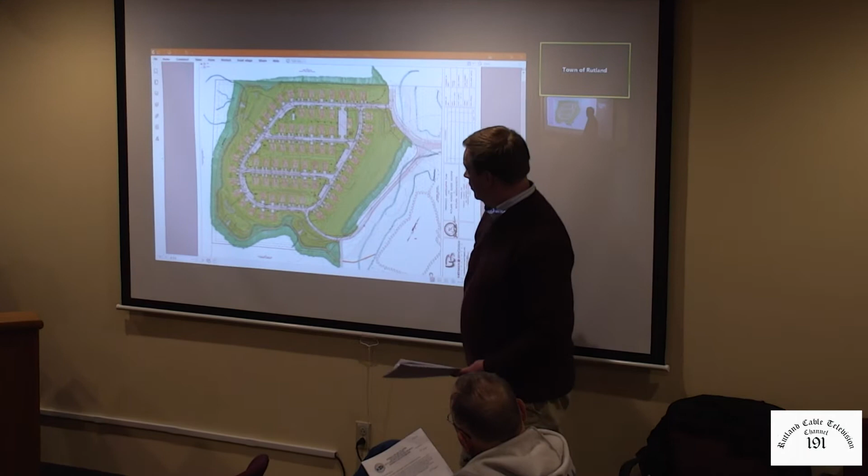Looking at approximately 4,240 linear feet of driveway. We don't consider this to be streets or roadways because we're not looking to have public layout associated with this. It's all going to be a private development. Everything's going to be maintained and kept within the association of the development, nothing to be taken over by the town. So we consider this as driveways. We did, however, design the driveways per the subdivision rules and regulations with regards to grades of the road throughout the entire site, and also the improvements here. We also, with regards to the width of the driveway, went along with the subdivision rules and regulations, being 24 feet for the amount of homes that we service by those driveways. So we did try to keep within the subdivision rules and regulations with regards to the roadway design, but none of it's going to be a public roadway network - it's all going to be a private network.

The proposal will tie into the municipal water and sewer in 2 locations. We have one location down here for the water and the sewer, and the second location will come down the existing driveway that will be improved to tie into the sewer and water that dead ends here at the end of the T on Rutland Heights Way.

The intent is to have this second access here that exists currently as an emergency access. About a year ago when the board met with the conceptual plan, there was some conversation about a second access. So what we were trying to do is continue the existing driveway that leads into the Rutland Heights hospital property, in roughly the same location. But from here to here, we had to show improvements to meet subdivision rules and regulations for grade and width.

We show minor improvements along the length of the driveway to meet a 20-foot width, to make sure we have proper fire protection. We had a department head review meeting, and the fire chief did get to see that and confirm he was okay with the width of the driveway. So that's what we're showing there, a 20-foot wide driveway.

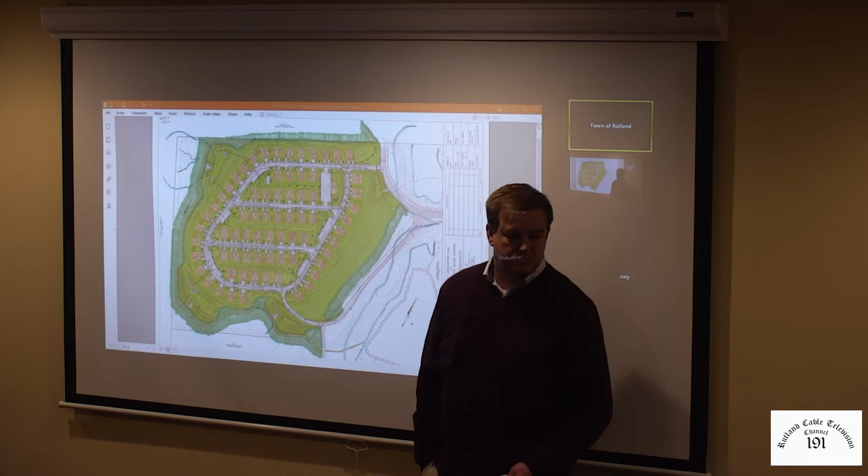One point we have to be cognizant of is part of the land disposition agreement we have with the town, which requires a certain number of units - I believe 88 - to be constructed within 3 years. So the phasing we're anticipating takes that into consideration.

We did incorporate this into our design - we have 2 connection points for the utilities for that reason, and also to help with phasing the project. We have the connections up here, so we can phase in a portion of the project for the sewer and water, and then work our way through, phasing the water and sewer as we go.

You'll start on the high side and work your way down, I presume? That would be the intent, to work on this side first. That should minimize erosion from getting too out of control - you've got a 300-foot run there, so it would cut pretty deep, but if you're doing small cuts, that's better.

This section here is really our biggest cut in the site, getting into the entrance, because the existing driveway is fairly steep and doesn't meet the subdivision rules and regulations regarding landing and so forth. So there is some cut as you come into the site, but we tried minimizing that as much as we could while still meeting the subdivision rules and regulations.

We do show landscaping on the plan, a mixture of trees and shrubs. Because of the type of development, and it was a concern of the developer, they don't want deep rooting trees, so they're working on figuring out exactly what kind of trees to plant. They're concerned about root impacts over time on the driveways, which are close together, and the sidewalks. So they're working on getting species that are aesthetically pleasing for the development, but also won't negatively impact the infrastructure long-term.

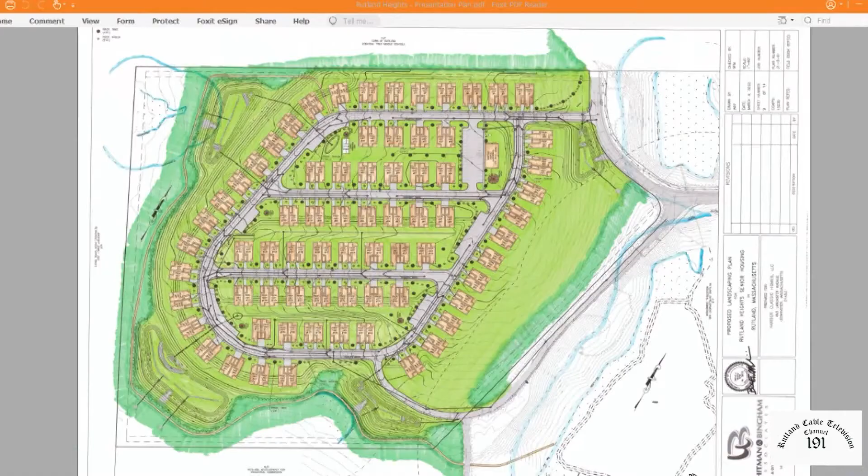I would ask, I don't know, what's the next step for the board? I can go over a number of items with regards to the standards this board needs to make their decision on, which I went over in my cover letter with the application. We can go over those now if you want, or wait to a different meeting as we get closer to the end of the review. That's a great place to start, so I don't think that's a problem.

So there are 5 things, and I'll list them out with our answers, and we can stop where you want to stop. The first one is that the project is consistent with the purpose set out in Section 23, the Heights Planned Development District. The project is proposed as a senior housing development with 142 single-story duplex units, consistent with that section, and I know that's one of the allowable uses within this district.

B is that vehicle egress on the site is designed so as to avoid hazard to vehicles and pedestrians. As I stated, the proposed driveways throughout the development were designed to the requirements of the Town of Rutland subdivision regulations: 24-foot wide pavement width, minimum grade of 1%, maximum grade of 8%, proper leveling areas at the end of the driveways, and minimum centerline radii of 125 feet or greater. We also propose a 5-foot wide sidewalk along one side of all the driveways to connect to the existing sidewalk out on Rutland Heights Way. We can talk about the sidewalks in a little bit when we get through peer review.

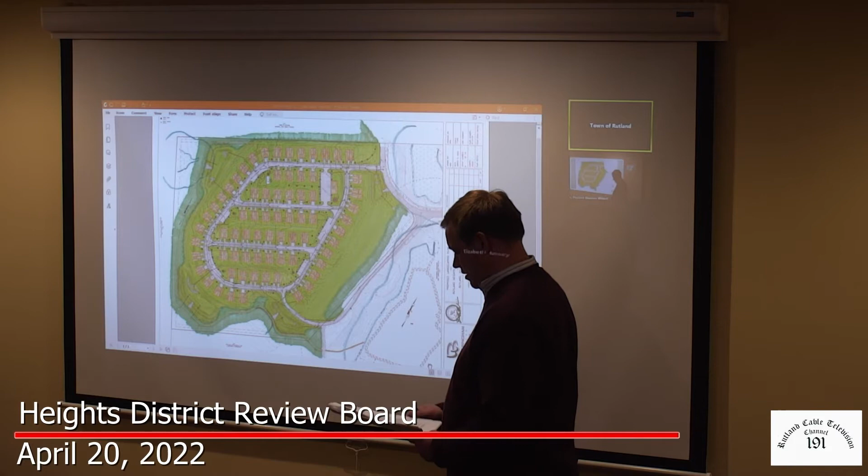Approximately 19 acres of the less than 33-acre project site was previously disturbed by the Rutland Heights State Hospital. The proposed development was sited to limit the amount of disturbance outside of the previously disturbed area. We propose about 7.5 new acres of disturbance, leaving 6.3 acres of the site in its natural setting, which would be outside the site to the west and south, and also this area to the east, within that Zone A of Rutland Heights Pond.

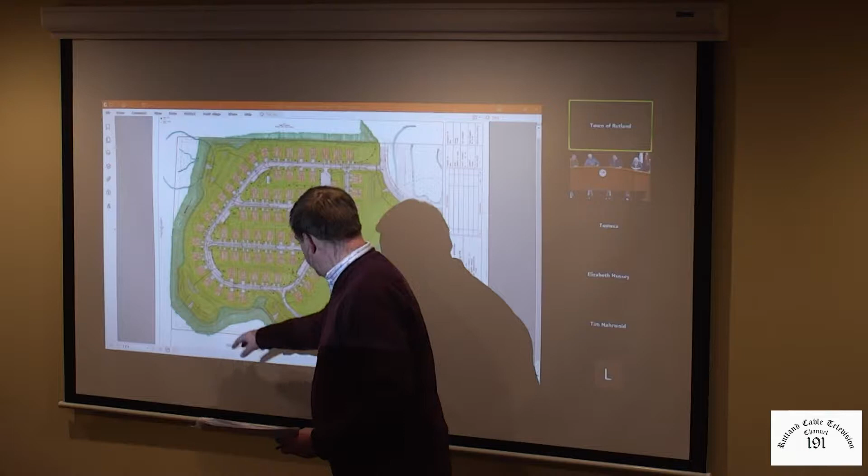Is that the darker green? Most of the darker green down here, but also this area here is fields. But we also, because it's in the 400-foot Zone A...

Rutland Heights Way - we're staying out of that? Yeah, because we will deal with DCR with regards to that, and we want to make sure we limit the amount of work within their jurisdiction. We're dealing with them for a determination of applicability right now, hoping they don't require any additional permits, that they're okay with it, because we kept everything really out of it. The only disturbance is really to the existing areas that are disturbed now, which is their driveway and a small walking trail, which I'll touch on in a second.

That's a public roadway, the bottom one, correct? Yeah, this is all town property, but it's not a public right of way - it's the town driveway out to there. There are other pieces of property in the back. I would hope they'd be a little more amenable, that's kind of why we laid it out the way we did - we tried keeping everything out of there as much as we could. Yeah, keep showing us.

The last criterion is that land uses are located to allow aesthetic circulation between one use and another. Undeveloped land is located in a manner that provides active and passive recreation, resource protection, and pedestrian and wildlife links to adjacent uses on and off site where feasible.

The project proposes, as I stated before, the community center, a larger gazebo, a pickleball court, and smaller gazebos located throughout. One thing I didn't point out before is the walking path that will connect into the gazebo and the pickleball court, winding around the exterior through the woods. Our intent is to drop them toward the pond so they can get a view of the pond and walk out to that area.

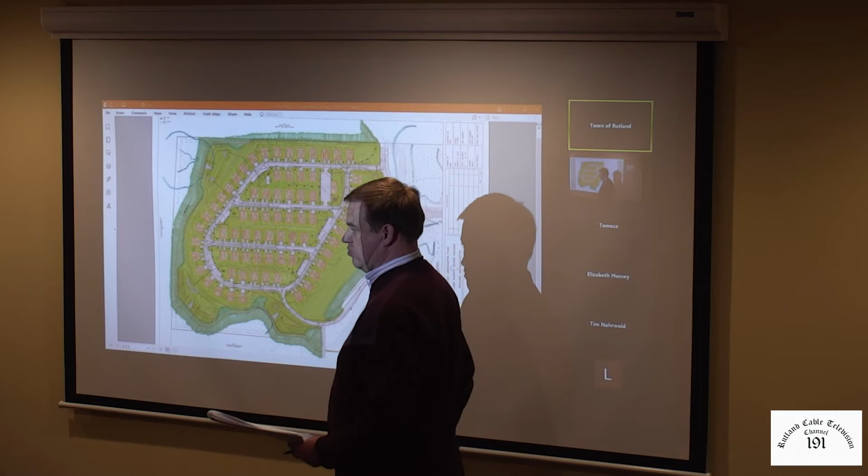The majority of the walking path stays on the applicant's property, but there is a small section that will be on town property, tying into the off-site amenity that the town has. Those are the five items that the board has to make the decision on.

Okay, all right, thank you very much. Anything else? There are a number of items that if you want to discuss now or hold off as we get going.

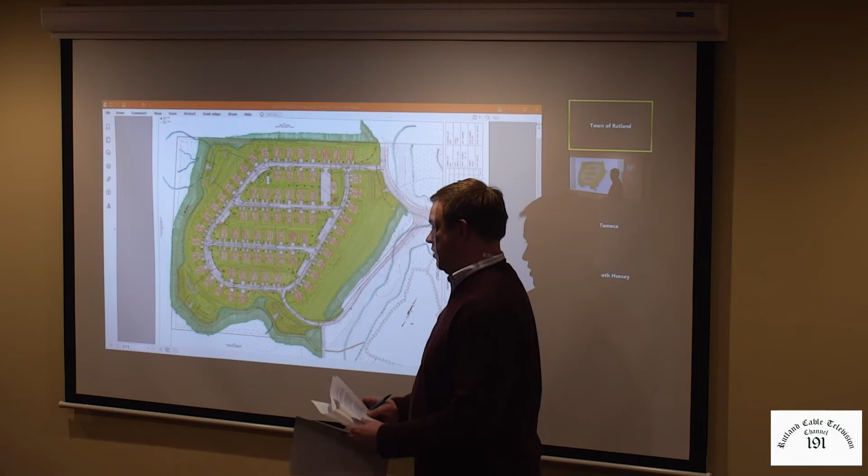I don't know when you want to get to the peer review or the Conservation Commission letter, we can. What I'd like to reference real quick is from the concept plan review we did, we had some items, and I'd just like to address those and put them out there on the table.

What did I do with those? It was actually in the meeting minutes, technically, that we had. Is this what you're looking for? Because that's got the 7. Yeah, the 7, yep, excellent, thank you. I think that's what you're looking for. Yeah, basically.

One is the number of units, well, the amenities that we talked about. When we went through the concept plan last year with the HCH, we came up with 7 main items that we'd like to see worked through, and just to put those out on the table here. The first one was amenities to be included and determined at a later date, which the applicants have talked about—the gazebos, walking trails, community center, flagpole area that they reworked, those types of things to build more of a community, not just a residential cookie cutter mindset.

Another one was the quantity of units, from 88 to 142. They produced a plan showing 142 units, so that's something we'll discuss.

The final purchase price was to be determined between HCH and the RDIC. The purchase price is not part of this board's review, just for the public's note. That's something the RDIC board and the applicant have worked through. Dick and Michelle are on the RDIC board, and they're also on this review board. But that's already been predetermined and worked out, and it's really not a condition of this board anymore. Just the fact that it got worked out, which it did.

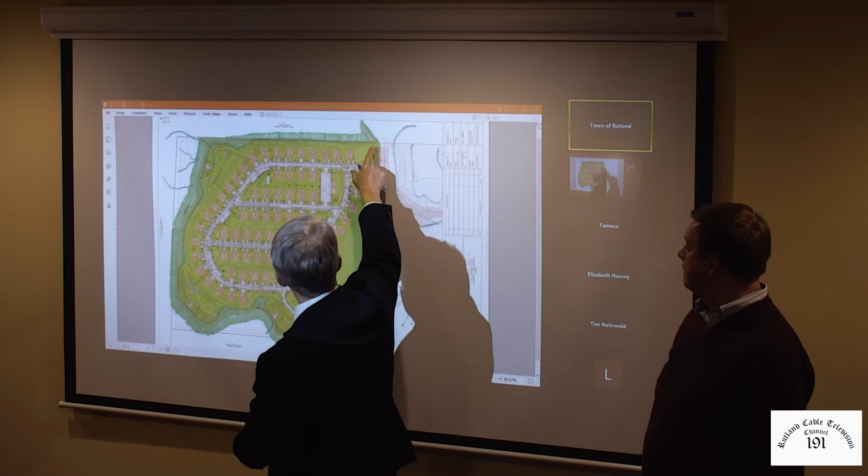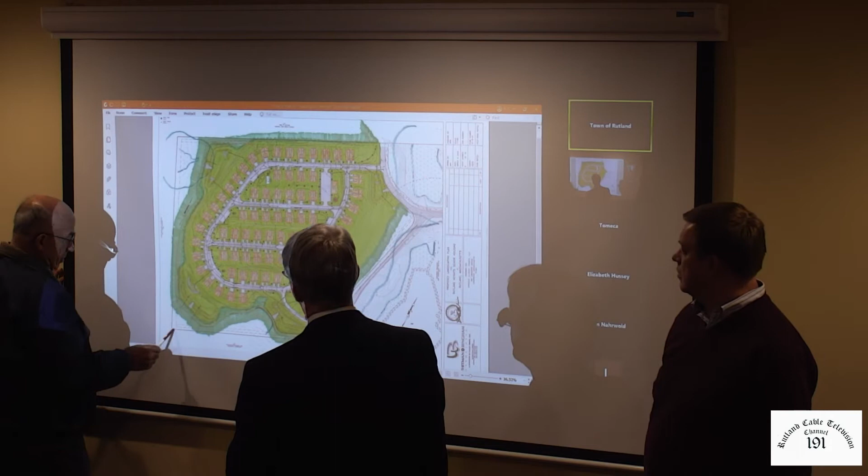We're assuming we're very close to that existing trail, trying to connect to it down at the bottom. Right now there's a path going almost to the very corner, near the chain link fence at the top—that fence goes all the way around, along the north and west, and then the south side of the lot. There's a pathway right now that goes down and around the edges. We went around the wetland at the bottom—you drew your line through the wetland, but we went up around it, since we didn't want to touch the isolated wetland. I'll say that trail went all the way around. We can definitely locate it and figure out how to tie into it.

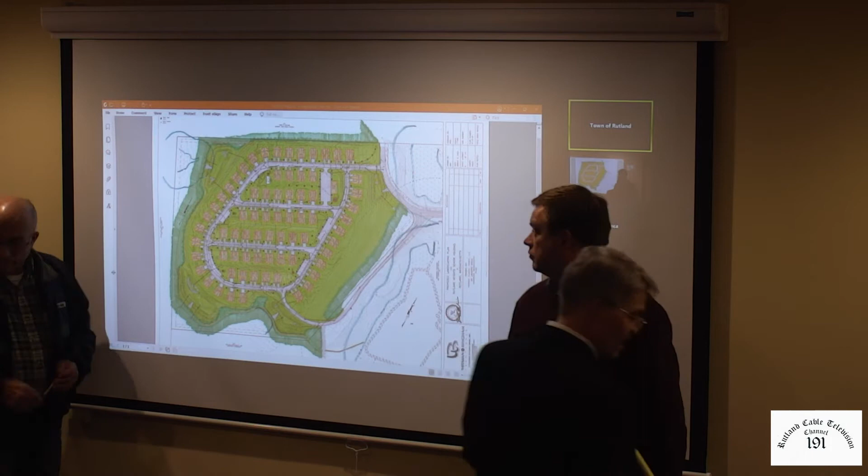It's not on our property once you get down there. So if it's off the property—that's one of the things I should have asked at the planning board—did your line go right to the chain link fence? No, it did not. The walking path we're showing now is different from the boundary lot line. That's one of the reasons why it does, on the western and northern property line, encompass all the town property and all the RDIC property. But is that chain link fence on your property line, or is it actually inside it on the town line? It's actually inside. So then they would own—that fence would be on their property, that is correct—by a foot or 2 or 6 inches or whatever it is.

One of the requirements is to have a buffer on the boundary lines. I believe it has to be landscaped and vegetated, and I don't believe you can have a walking trail in it, but if it's already there and existing, that's different. I'll definitely go to the site to understand exactly what you're describing, since it encompasses the boundary lines you're discussing and you're probably more familiar with the site than I am. I don't doubt the walking trail that's there now is probably outside what we're designing here.

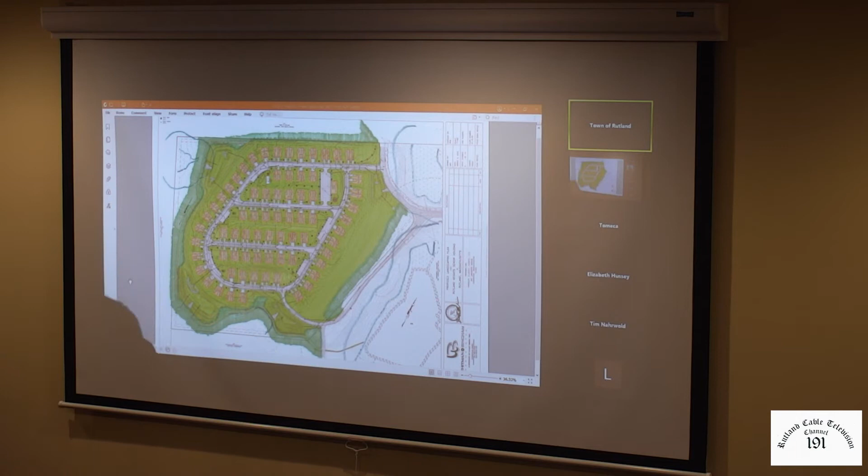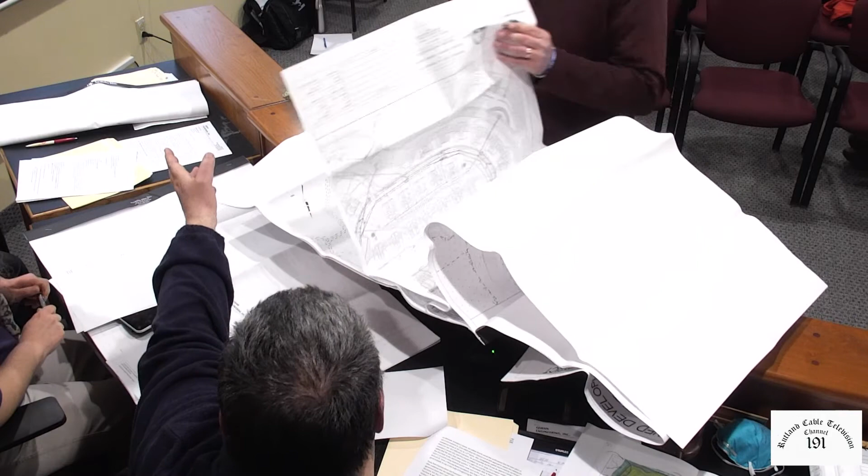It used to come around that way. See what's up in that corner? So we go down to the existing 30-foot buffer, and what about the trail on the right? Isn't that the property line offset? Go to the right, 'cause you get two on the south side. Correct, so the short one, the closest one, is the offset, and the other one's the 30-foot. And that other one looks the same distance as the western single one, right? So access to the walking trail - that's the 30-foot buffer, and that ends in the property line offset. That's perfect, isn't it what we wanted?

Not to belabor this, but I guess if it's possible, Attorney and Wes, could you guys look and see where that existing walking path is, and if it's something you can incorporate into a portion of this - understanding we've got to stay away from the wetlands and need room for the retention basins - but if that's something we can work within and try to pick up as best we can, is that amenable for you, Dick? We'll take a look at it.

I know off the top of my head, anything in this location here, that paved driveway you can come up on, that's all being taken out and loamed and seeded, and it's all getting regraded as part of getting the driveway in and the units in. So all of that's going to get removed. This will be the new start of the walkway across the street from that parking lot.

We'll take a look - really, I think the best we could do is maybe tie in down here to the other walkway. You keep on going and back around, and you can get up here.

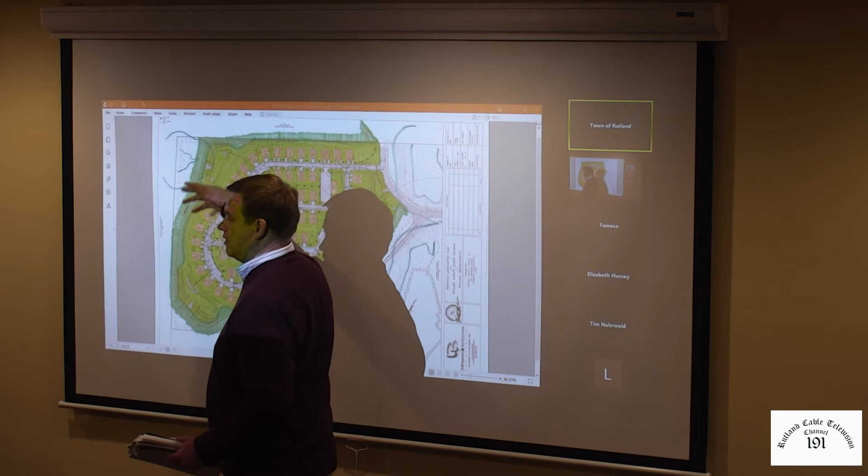As Ron stated, we were trying to stay away from the wetlands as much as we could, to keep the Conservation Commission happy and make sure we're not filling any wetlands. But also on that lower portion, there was an isolated wetland - if we start filling that, it becomes an issue. In the lower portions, I can see where you would make your way around here, and this is where we were trying to look at the areas.

Jim Crandon has a question - as part of this walking path discussion, I suppose any paths that you're taking over or connecting to on your property, I assume the homeowners association is also picking up responsibility to maintain them. Yes. Otherwise, if there are areas that don't make sense or don't meet your plans, that should be clearly stated. We'll definitely take that into consideration - an unmaintained trail doesn't do anybody any good.

Michelle, go ahead. But doesn't that make it more of a private trail and not available to the townspeople who currently use it? If it's being built and maintained on the HCH property, which is going to be a private community, it's not going to be public access - the roads are going to be private, like a private driveway rather than a roadway. So does that mean people can't use it, that it would be limited to just the community? That's something Peter and I were talking about too, and we have to have that conversation about how we can achieve that.

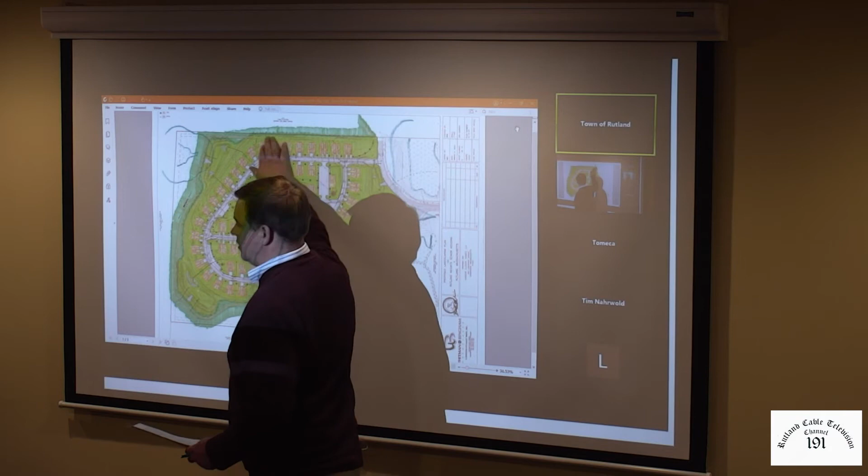We're proposing to grass it, but the slope we are showing here doesn't really lend itself to great landscaping. There's a fair amount of trees between this and the middle school, so we weren't showing any landscaping. Does it drop off back towards the woodline? Yes, especially with the road grading, there's going to be about 6 or 7 feet that drops off to the back there, so there's not a lot of usable space to put substantial landscaping in the back.

So we're gonna have it grassed, and the existing tree line will stay along that property line on the other side of that fence. That's really where our landscaping is gonna be, our buffer to the middle school, and the project is gonna be what's there now.

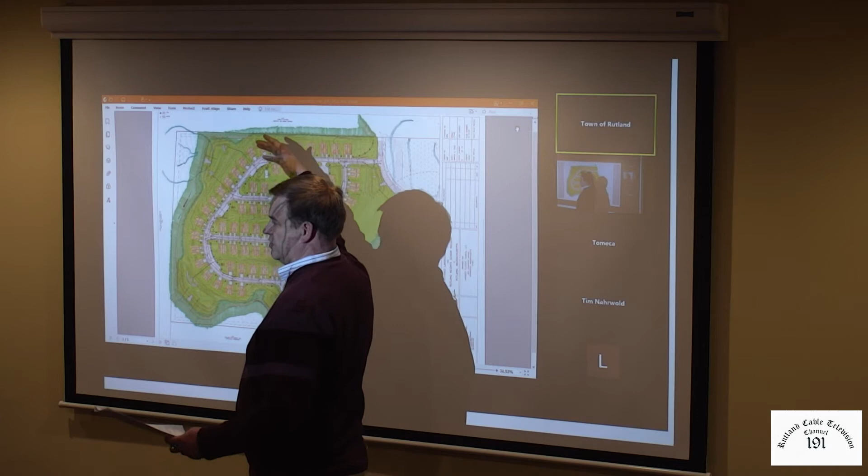Okay, so what Wes is referring to here in these HPD bylaws, we're gonna have that 30-foot landscape buffer. They're just gonna grass it, kind of using the wood line that's on the town property, correct? It is.

So what's your thoughts on that? I'm happy, you're good with that? Yeah, just let them grass it and use the existing wood line. Is everybody okay with that? Yeah, there's a whole lot of trees there, and I don't know what they use that land for. It's probably a couple hundred feet. I don't know how you build right up to the lot line there. Several hundred feet of trees at least.

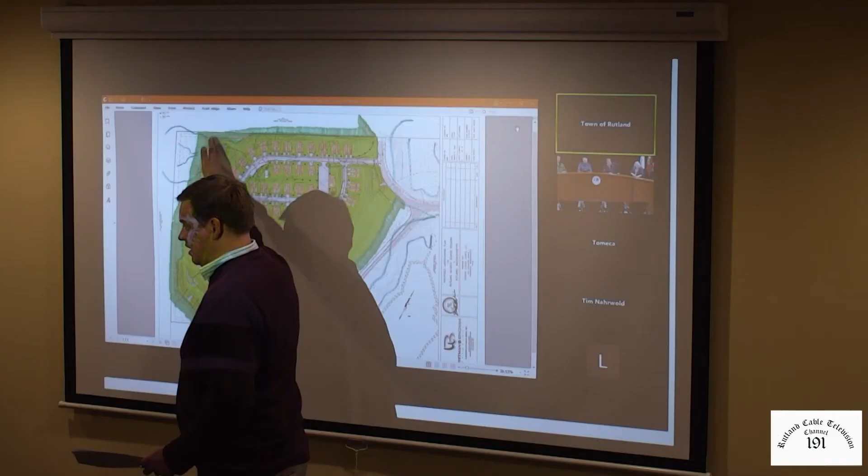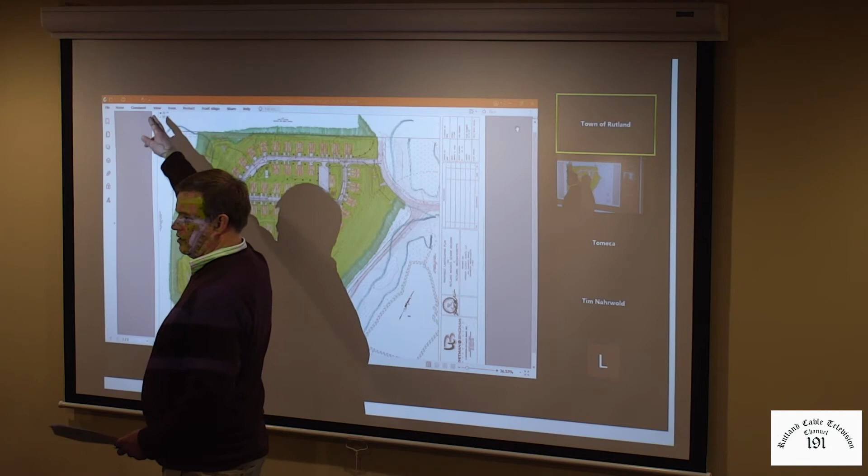And then on the other property lines, we're leaving natural vegetation on the other boundaries. Does anybody know if any of that's wet in there? I see the wet coming off that north side, northwest corner, up on that north side there. There may be a small wet area over onto the west, just off to the side, because everything kind of comes back around and wraps through this property, down to the pond to the south. So it's pretty unusable land, as long as it's a swamp. If it's a swamp, yes, definitely. Yeah, if the town ever wanted to expand the middle school property, they could.

Yes, okay, all right, I think that's fine. We could work with that. Number 10, a landscape strip is required along the front lot line, and then they defer to the board on what landscaping.

Like I stated before, the basin location really is dictated by the grade. It has to be in this location. There's nowhere else we could put the basin. It gets fairly steep in here, so we really can't, and we didn't want to get into playing with the existing depression that's in the corner there.

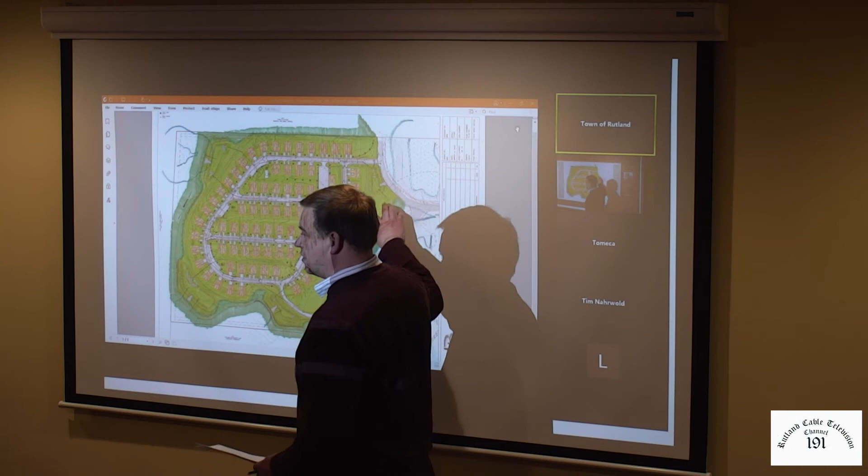Sidewalk's on the other side, right? The sidewalk is on the other side, yes. And then we do show our landscaping and our entrance sign as you come into the project on your right-hand side. You get a sidewalk, kind of curls up north, you've got a crosswalk going across that road, and then a new handicap ramp to tie into the existing sidewalk on that side. Right, and so everything will be tied into that.

I mean, the sidewalk's not on that side. If he's gonna run the retention basin up to it, does anybody have a problem with that? No, no. So the sidewalk just goes up to our property and stops? Nope, it ties into the sidewalks all the way through.

There is no sidewalk on that Rutland Heights Way property - there's no sidewalk there. It's on the sidewalk all the way up this way, and we're gonna tie right into it. There's a sidewalk over there. In that little piece of land between the parking lot and our property? No, he's talking about the main road, Rutland Heights Way. Right up to when you hit that point where your fingertips were, that's where the sidewalk stops.

Correct, up here, and the sidewalk is on the right side, on the lot line. He's gonna tie in, and then you can at least walk down Rutland Heights Way back out to Maple Ave and to the center of town. So there will be a pedestrian connection there.

So as the sidewalk comes down, the retention basin's on the other side. It's gotta come up to the edge of that roadway, but like I said, site constraints on the road, we really had to do something there. It was something that we looked at, and the only other area we were looking at is the small patch across the street, but there's such a steep slope, it didn't make a lot of sense. So that's kind of where we put it. And we were also out of the 100 foot zone, and it is steep over there, so it does make sense.

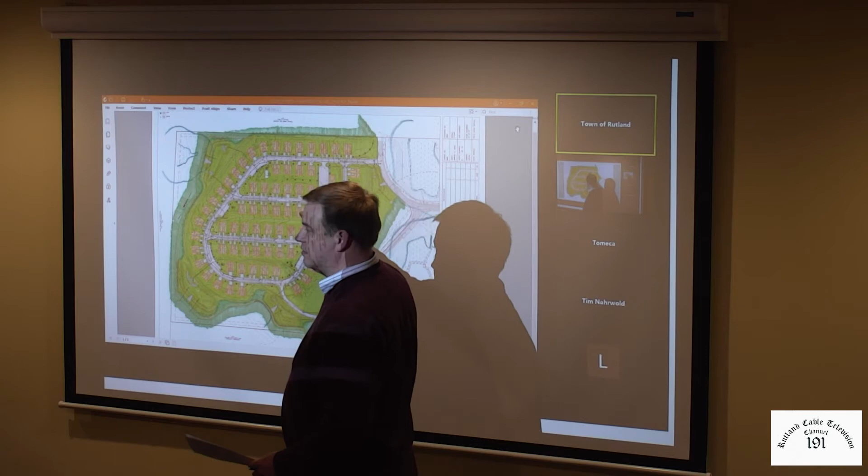Again, it was something where he wasn't sure if the board wanted any kind of islands. For the size of parking areas we show, we didn't think it was really necessary. It kind of defeats the purpose of what we're trying to do, because then we'd have to create an additional parking space outside of that island. We thought it'd be better maintenance-wise to keep everything in one compressed area, especially when they come to plow.

Exactly, bingo, right there. I know our guys hate islands, right? Oh, God, islands are... yeah, especially for parking lots of this size, they're so small, we didn't think it would be necessary.

Just to play devil's advocate, you've got a big asphalt area, big impervious area. It's not Walmart, but it's still a parking lot. Personally I don't have a problem with it, but I want to make sure everyone on the board understands that putting a set of islands in the middle breaks it up. Personally, I just think they're going to tear them up every winter plowing that lot, and it'll look worse than if you think a parking lot looks bad already - it'll look worse when they're beat to hell. I don't see any problem not having those on that particular parking lot.

So I'm going to skip ahead to number 15 now. The other items are things we already added to the plan or already talked about.

Number 15 is under your senior housing bylaw, and this is where we've had a lot of conversation over the last year during our project meetings with the town, trying to get to this point about which regulations hold and which ones don't. The HPDD regulations within the zoning district call for certain buffers to property lines, but the senior housing bylaw has other buffers. He had questions regarding the required setbacks - it wasn't clear to them, and he wasn't sure if the board should be the one to have that conversation or if it should be the building inspector.

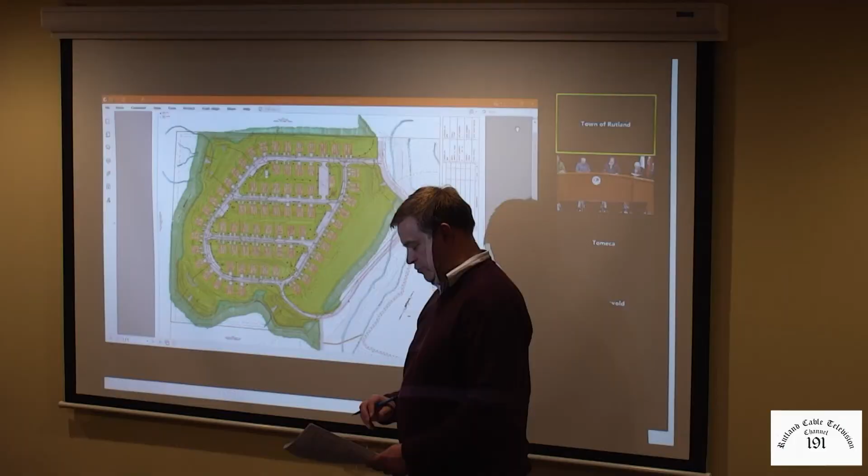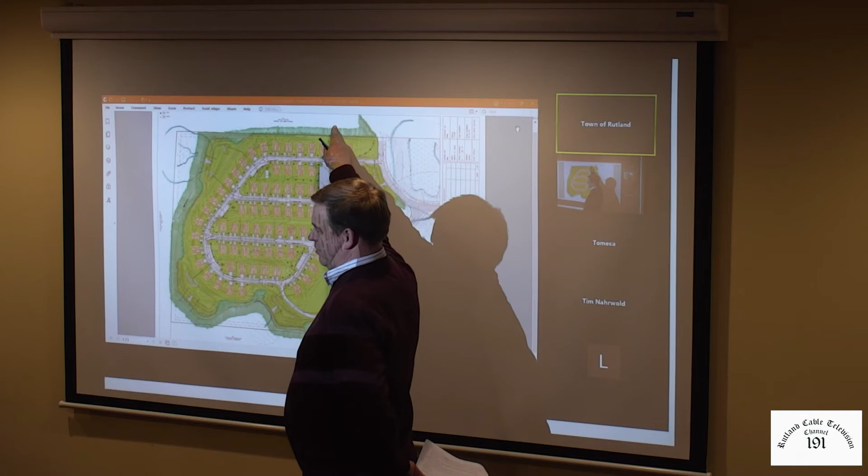The only item, at least with regards to the senior housing regulation, that we saw was different from the senior housing in the HPD regulation would be the buffer to the northern property. It talks about single-family residential zoning. Technically this is residential zoning, but we know it's not single-family - it's an institution, right? So that was the only section we saw in regards to whether it needs to meet that requirement.

We show 40 feet between the back of the unit and the offset, which meets this board's zoning district regulation. But the senior housing regulation calls for a different buffer if you're next to a single family - their buffer is 50 feet. That's where that trade-off comes in. We've talked a ton with David beforehand about waivers, and Quinn was talking about it too - we're trying to figure out if that's another waiver we have to add to the list for this board to take a look at as part of this process.

It might be a formal way of making sure we close the loop on it. Wes, if we would allow the 40-foot versus a 50-foot. We've had some conversations, Dave, before where the way I understand it, David, and I'd like to reaffirm your opinion, but this board has the latitude to go where the HPD has the lesser standard.

We have the full ability to go to that 40-foot rather than be stuck to the 50-foot of a true 55 community, correct? I think it's even simpler than that. In this 24/5, it specifically says a minimum 30-foot buffer shall be provided at the rear and side district lines of HPD. The board may require larger, but the board doesn't have to require larger. And then it gets into other requirements, and C says all structures and uses shall comply with the town of Rutland zoning bylaw.

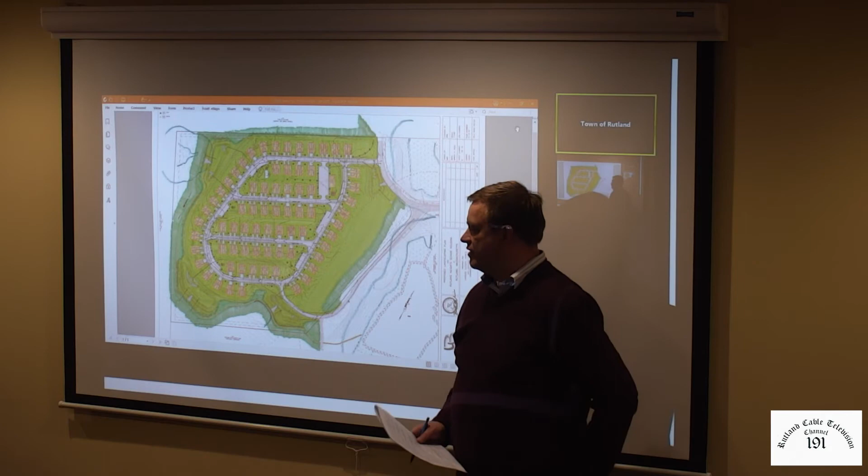Exactly, I think that's exactly it. Quinn, if this was the ordinary subdivision, we're looking at the zoning bylaw, the open space in particular, and the subdivision regs. In this case here, we're looking at several different bylaws and several different regulations that all have to harmonize. I was around on the RDIC when that was created, and the intent was to give this review board latitude to meet the intent of the Rutland Heights bylaws, and this is not just an average, run-of-the-mill planning board subdivision.

Whatever would happen up here is going to need certain tweaks and things to fit this property, to work with an applicant, to get somebody up here to develop this property. So the town certainly built that latitude in there to help develop this property and come to a project like this.

So I think we're all in agreement here that that's pretty much the way this is gonna roll. Perfect, and that's right along why we just want to make sure that that was the intent, because we wanted to make sure if we had to ask for another waiver, we would add it to the list. Yes, and I don't have a problem with this, especially where it's abutting the town property up there.

But we don't set a precedent against ourselves though, do we, on the other lots? Because I could see where someone might not want something 30 feet, closer to a property line where there's an abutter existing there. Yeah, I mean, again, we have the 30-foot rule that we can go up to, so we're not gonna get closer than that, right? We're not gonna get closer than that. They would need a waiver on that.

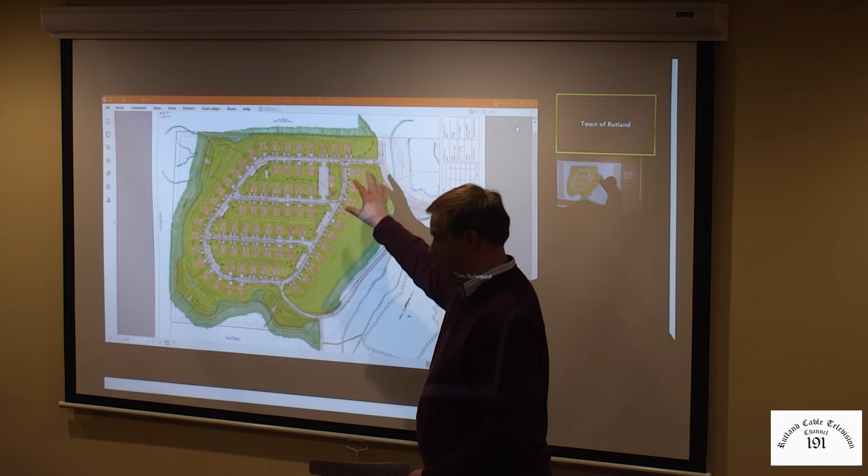And the other requirements in the senior housing bylaw and the HPDD bylaw, we do meet all those other offset requirements. That was the one that stuck in my mind, because there was confusion, and we went by this zoning district's bylaw. Other than that, we meet both requirements, so it doesn't matter which one you were to use, we meet both of those.

Thank you, Wes. I'm going to skip ahead to 19, because we did talk about it real quick. The fire chief, Quinn, recommended that we solicit comments from the fire chief, which I know he was submitted the plans. It talks about adequacy of access, and I'll touch on it again, as we do show 2 points of access, 24-foot wide and 20-foot wide.

I know dealing with the fire departments in the state, they require 20-foot wide width minimum. Some guys will allow gravel, some will want all pavement; we show all pavement for 20 feet. That's the way it's going to be - it's going to be a paved road all the way through.

We've had some considerable discussion on this, and I believe, as a board, we're pretty adamant the best thing for this town going forward is to get that paved and cleaned up. Let's get this place looking nice on that hill, get the right road in there. We got someone that's willing to help us out with that - having the town work with DCR so that you guys can accomplish this, I think is the best thing for both of us. At the end of the day, the town's going to benefit, as well as all the people, and it's going to be a nice, beautiful end to the project for you guys to help sell up there too. So I think that's the way we want to approach this, Wes, okay?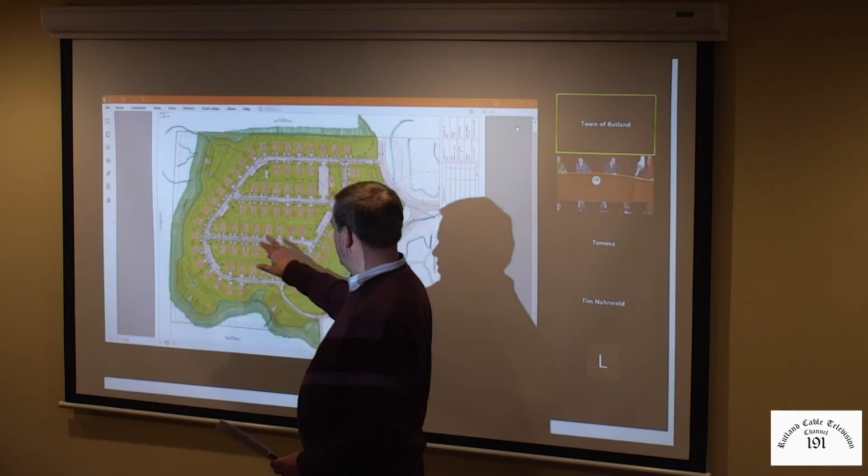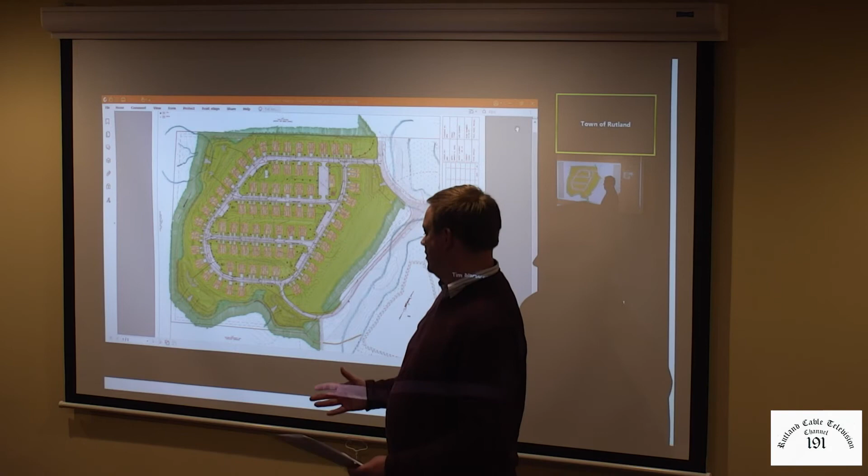I can tell you, at least on a fair amount of these here, there's not enough room to park a car in between the two of them, because it's literally only about 10 feet between driveway to driveway. So there's a 10-foot grass strip there - a lot of those areas, you're not gonna be able to park even in there. So I can see it both ways.

Not looking for granite curbing, no. Not even precast concrete, but asphalt - yeah, that's the extruded type, right?

Just to let you know why we like it - was that 6-8 inches or something like that? Yeah, about 6 inches. It's got straight, clean edges here. Snowplows, when they hit it, they don't wreck it, they slide up and over it. That's the idea of the Cape Cod berm too. So it's 6 of one, it's a trade-off.

Yeah, I mean again, I like it - I like to have the edge, the edge, yeah.

Are you okay with the sidewalk up to that edge? Yes, I mean for this, because of the way the whole setup is - for a subdivision it'd be a whole different story. And I agree with you too, it's the clientele - remember it's an over-55 community.

Granted, you're still gonna have people that goes both ways. 55 - be careful, 56, I know. That's a double-edged sword, I agree with you. They're not always more experienced, but they know what they're doing - well, they aren't always right on target either. But you see less traffic.

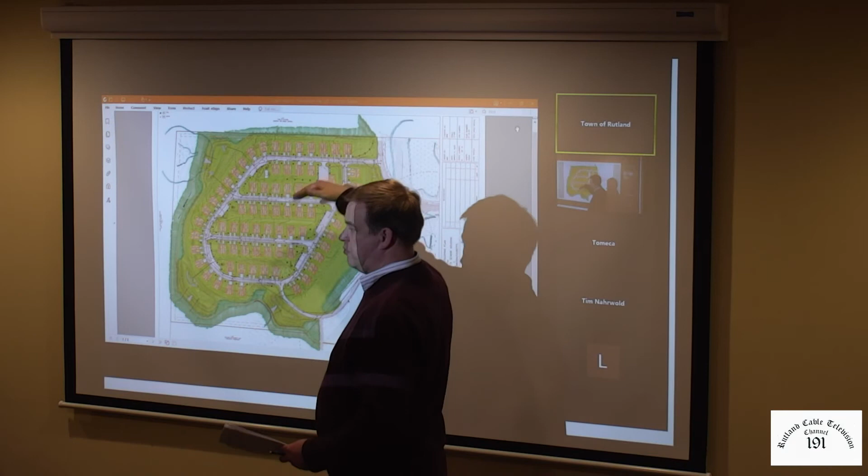I do want to let you know, if you want to have that 5-foot grass strip, all the units on that side will have to be pushed back another 5 feet. We'll have an additional 5 feet to the driveways, and it will compress the backyards a little bit, and even the same with the exterior. So it is gonna be a change.

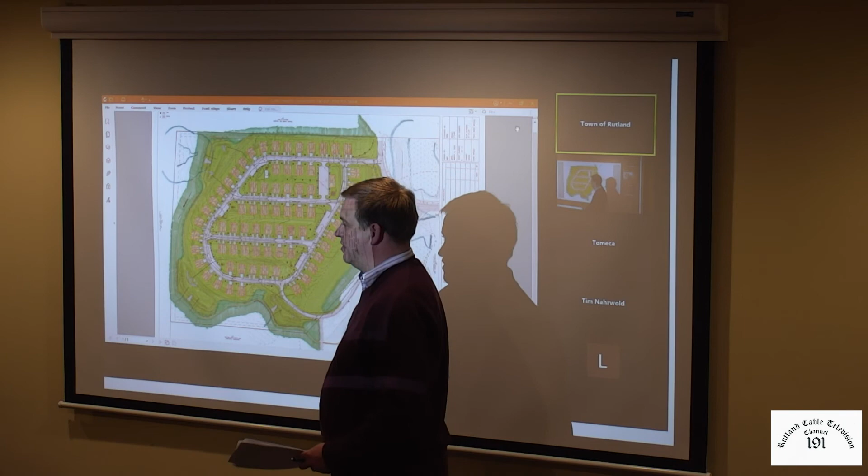To have the strip, you're saying? Correct. But you wouldn't have to do that if we kept it up tight to the road. Correct, it doesn't, exactly. The layout stays the way it is, because it'd look ridiculous having a 5-foot grass strip.

And that's what I'm saying, the units that have the bump-out in the front, it's gonna be 5-foot paved and then 5-foot grass. It's gonna look a little different there. So that's why we're thinking a 10-foot grass is more substantial. It has a better look to it, where you might be able to shrub it.

How wide did you say the sidewalks were, Wes? 5 foot, I think. It's pretty good size.

What do you guys think of that? If we mandate the speed humps in there to dictate that, keep people going, what's your thoughts on that? I think the speed humps are a great idea, Jim, because that's gonna keep the speed under control. Sometimes it's fine for Florida, but is it okay for up here when you have snow? Well, that's why I mean, they're all around in parking lots, you see them in every office building.

Schools, we can do it up here too, but a lot of times now they've been using the smoother speed humps, it's a 3-foot, 4-foot wide, so you can plow it a little more effectively. It's not the old one that'll shake your teeth out. But it's a pretty good size stretch, and it's low profile, but it gets the job done and it doesn't ruin your car. It keeps you honest. I mean, let's face it, if you're out of control, nothing's gonna stop you.

Chris, I don't mean to interrupt. Yep. Tim has his hand up. I didn't know if he wanted to comment on this. Tim, hang with me just one second, I just wanna get the board's opinion on this, how you guys are feeling about that. I'm all set, but maybe you want to listen to what Tim has to say first. Yeah, if nobody else has anything, we'll throw Tim on there.

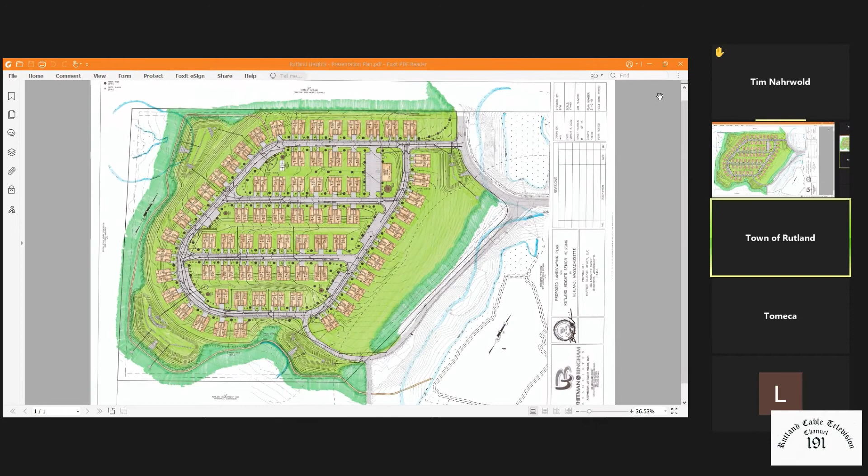Thank you, Tim. Any other comment on this? All right, so are we safe to say that we're okay with this up to the edge? Jim, are you all right with that? I'll move it. Okay, all right, so we're good with that then, with the edge curb. Go ahead.

27, and it's a little bit of conversation with Quinn, but I also want to ask the board. So 3 of the basins are designed, we call infiltration basins, which would be the 3 here. Yep.

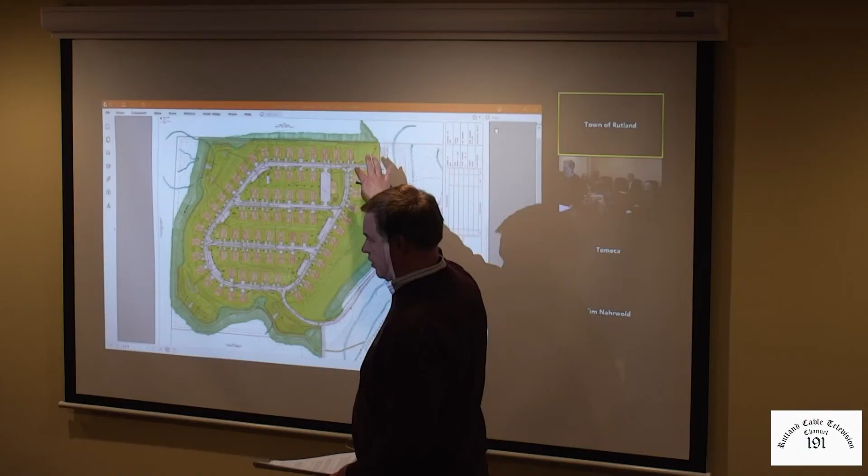We're required to infiltrate some of the stormwater back into the ground once we start adding impervious surface. This basin, we couldn't get to work as an infiltration basin because of the way the grades work with the driveway, we had to get it deeper. That's not going to act as an infiltration basin.

So we're required to have offset to groundwater for these basins, but these basins are shown, majority of them, in fill. So we're not necessarily so concerned about the offset to the groundwater. The other reason I'm not as concerned is that there's a fair amount of elevation change before I get down to the basin here. So if I need to raise the basin 2 feet or another 4 feet, stay out of the groundwater, these 2 basins, you're all right.

We could do it during construction. To get out here to do the testing right now is a little more difficult, and we're required to do soil testing to verify groundwater depth. What we put in our analysis was that during construction, when they start to clear out here and we can actually get to those areas of the site, we would do the test pits. We'd be willing to alert Quinn Engineering when that's going to happen, so if they want to come out and witness the testing with us to make sure the groundwater depth is where we're saying it is.

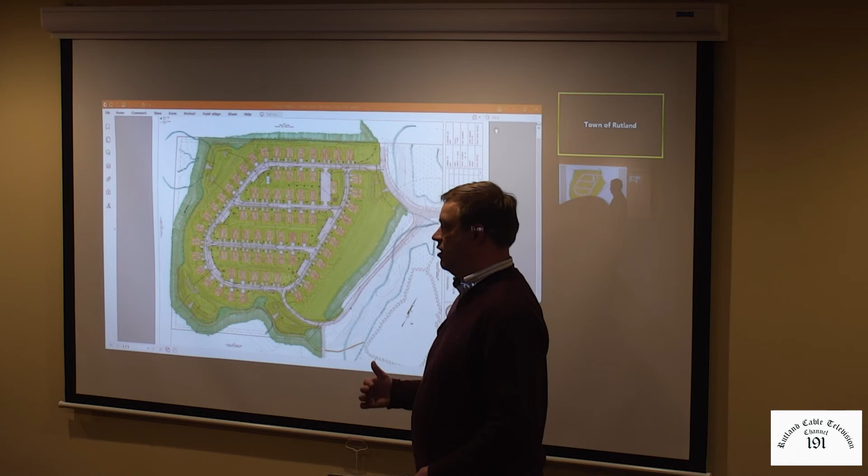But we do have some flexibility within the design to raise those basins if we needed to, another 2 feet, if the groundwater was, say, a foot under the ground, which we don't foresee. Very unlikely. So we do have some wiggle room there. We'd rather do the testing.

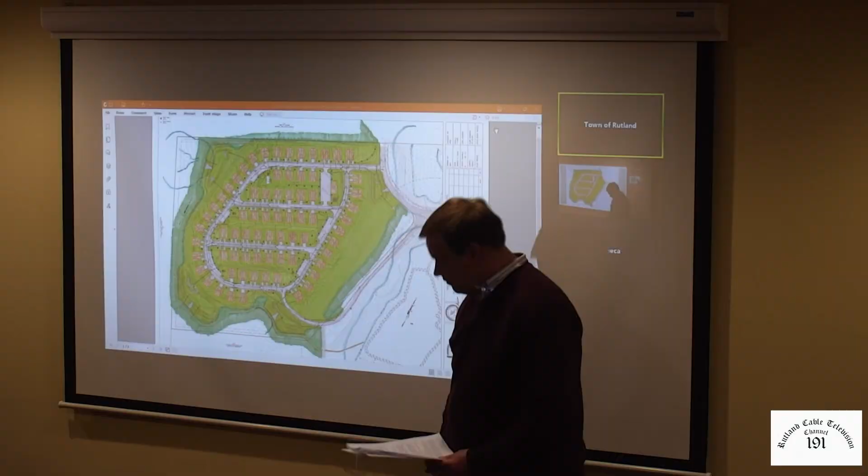Okay, yeah, perfect. Yeah, oh, yeah, sorry. No, so- Oh, yeah, excuse me.

Hi, my name's Jeffrey Ham. My wife and I are abutters, and groundwater is a real concern for us. We own property at 100 Maple Ave. Currently the groundwater runs about 8 inches below the basement slab, and it's dealt with by sump pumps.

We'd like to try and be assured in some way that this project isn't going to affect what we have. Currently it's a preschool, and should that groundwater level change, we're going to be faced with space that we can't use. The building that was built next door to us years ago did cause a groundwater problem.

The state came in and did some remediation, but it's kind of a messy situation we have right now. I don't know if you have high groundwater, Doug, or not. I can get 4 feet of water in my basement, yeah, so it's a really high water level. Right now it's managed.

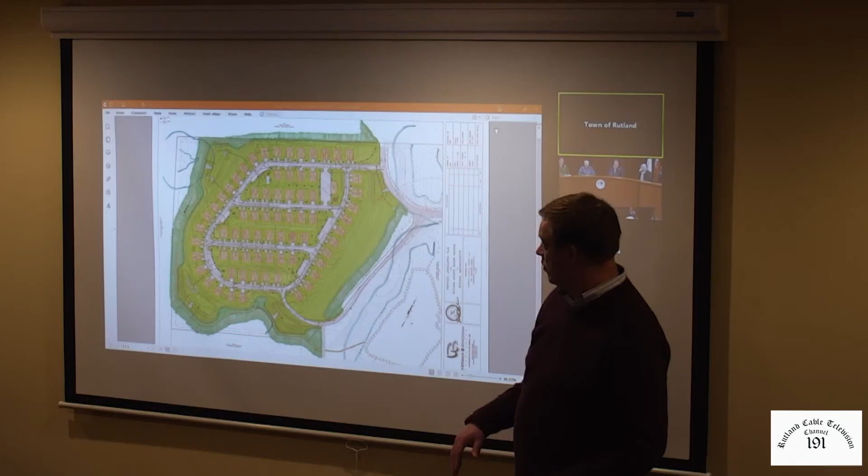This one's going to be on the other side of the little stream that goes down through, so you're safe from this project here. At least surface water wise, any of the water from this site gets to the pond and goes down toward the southwest. It's not directed toward Maple Ave. Everything's cut off from here and goes off to the southwest.

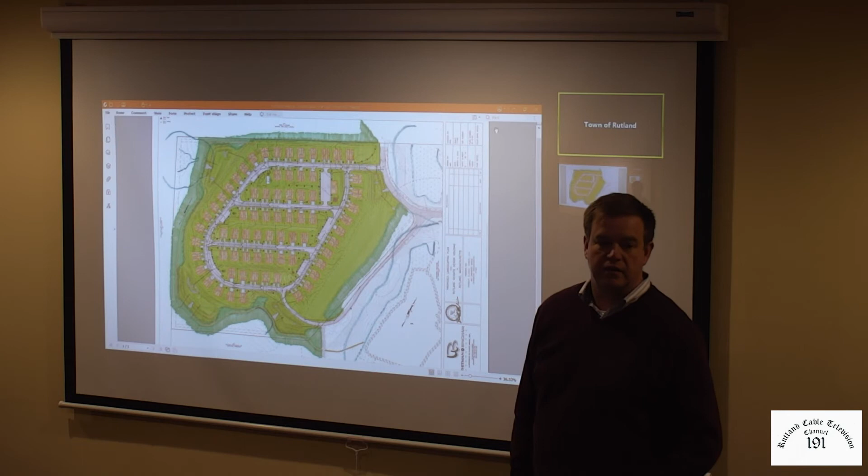So the level in the pond is managed, is that what I'm hearing? The way we have to do our drainage analysis, we've got to make sure we're not negatively impacting that water that goes to the pond now. That's why we did all the stormwater analysis, to show that we're not increasing the peak rate of runoff to the pond. That's part of what Quinn Engineering looked at—if there's naturally there now, they've studied that, and we can't increase that amount.

Correct. Does that make sense? Okay, that's going to the pond. And we've got to be careful of that pond because of that dam, it's in very bad shape. The beaver is our biggest problem with that pond, because they come in to stop it, and then the water level comes right up to the top. The managing of that, which they've been doing really well lately, keeps that water level down where it should be.

So just to give the overall picture, this gentleman, Wes, is the engineer designing this to maintain the water. But we also have Quinn Engineering reviewing all the calculations. They're a third party from Paxton with no stake in the game, just looking at this to protect the town's interests, particularly the abutters, making sure his calculations follow state requirements so all that water goes the way it naturally goes.

This is just a brief outline right now of certain things they've found, raising questions to get more information on. So we're going to continue with this, and Quinn will be making sure. I'll never stand here and guarantee you won't get water in your basement, but I think we're going to try to make sure that doesn't happen to anybody.

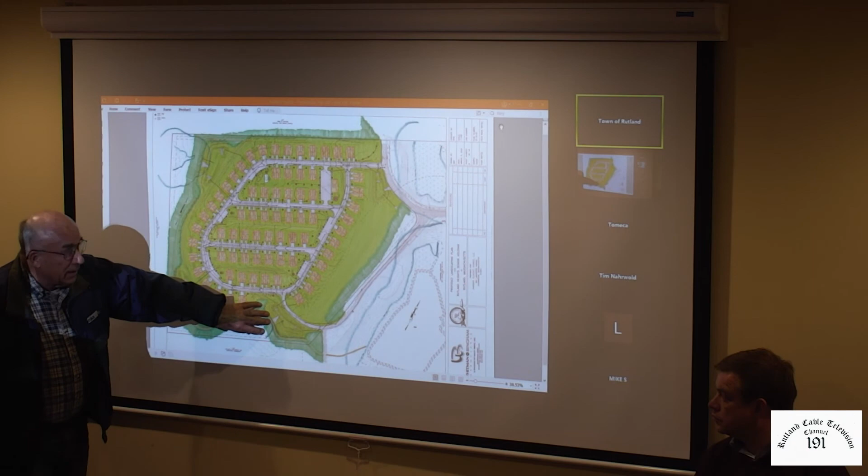But I was gonna say, when I used to do brush hogging, this used to be the nurse's garden area, right down in that area. So just to let you know, the soil's looking pretty decent. I was gonna say, must have good soil there.